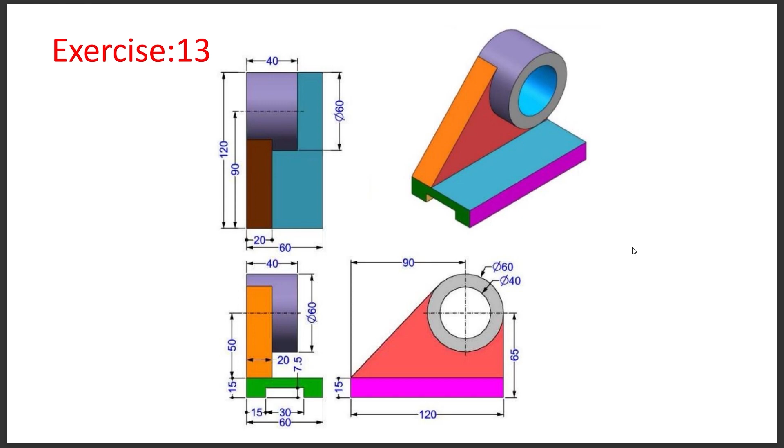Without wasting time, let us start modeling using Autodesk Fusion 360. First we need to create a new design, and save it by the name of exercise 13 to a specific folder called Fusion. Exercise 13 is saved.

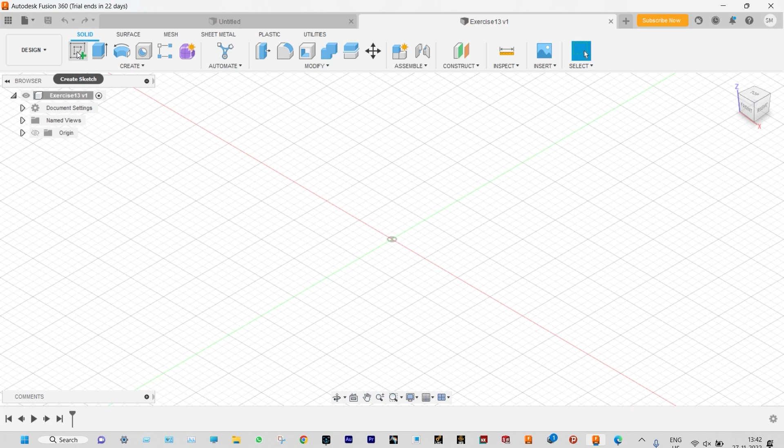Let us see the drawing again. As told before, this will be started from front view and extruded to a depth of 120 millimeter. We have to make this shape initially, starting from front plane with the sketch.

We made the sketch at random. Now we can put a smart dimension to this one: 60, 15. Again this one is 15, and this will move up by a distance of 7.5 millimeter.

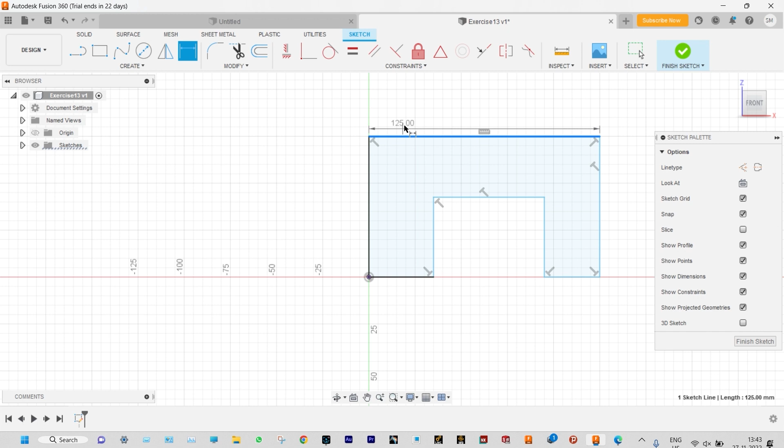We can point the dimension of this one as 60 millimeter. Smart dimension, this one is 15 millimeter, this is also 15, this one is 7.5 millimeter, and the total distance between them is 60 millimeter. The distance from here to it will be 15 millimeter, and this distance also 15 millimeter. So this drawing is complete.

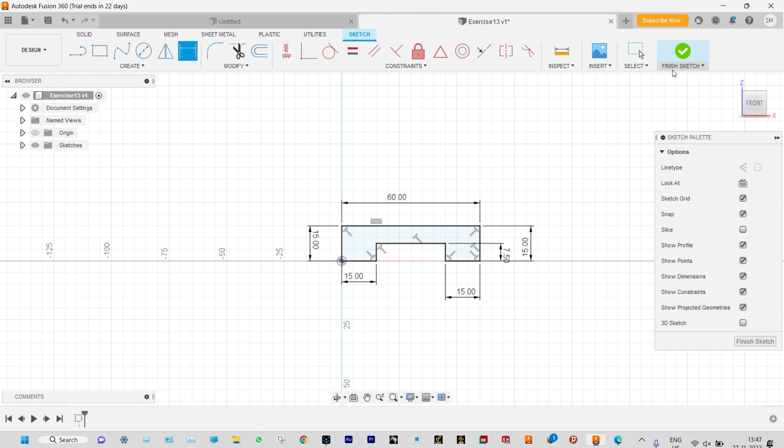That needs to be extruded to a depth of 120 millimeter. So finish sketch and let us start extrusion from here. Extrusion depth is 120 millimeter. Done. Let us see the drawing again.

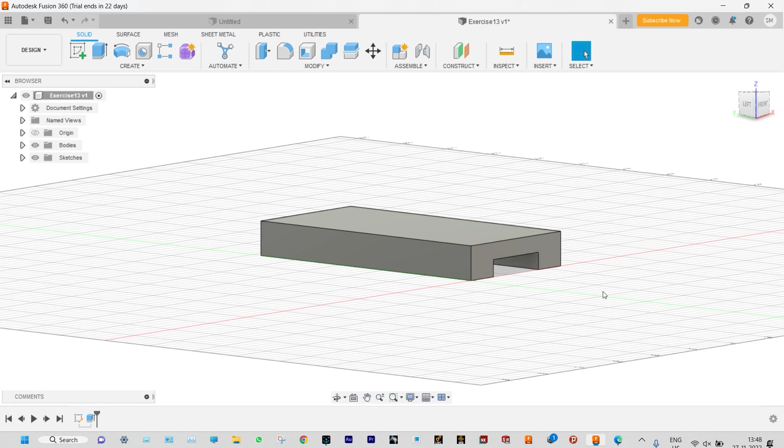Now we can start from this side view. We need to sketch this and extrude to a specific depth. First we need to make 2 circles of diameter 40 and 60 millimeter at any arbitrary position on the right view. So we need to start sketching on the right plane. We can rotate the object and select that specific plane.

Starting with sketch, we can rotate this a little bit. We need to start sketching here itself, starting with circles, providing 2 specific circles, making both concentric.

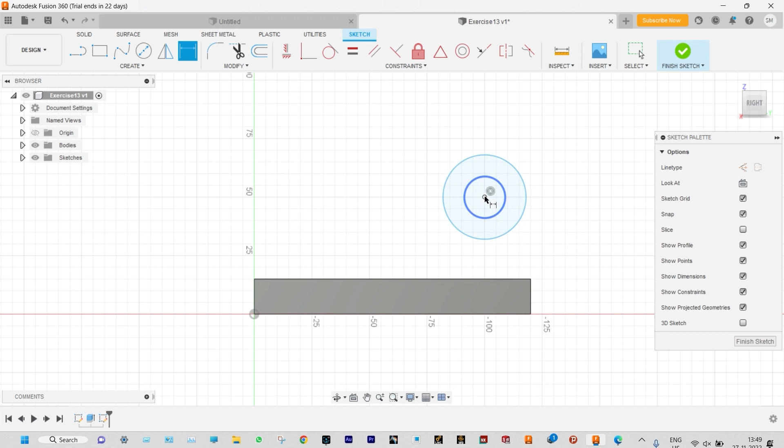Now we need to provide smart dimension to this. Let us see the drawing. The circles have diameters of 60 and 40 millimeter, and from the bottom line it will be at a distance of 65 millimeter, or from this line at a distance of 50 millimeter. You can provide smart dimension: from here to here it's 50 millimeter, and the diameters are 40 and 60 millimeter.

This one is 40 and this one will be 60 millimeter. Also, the center of the circle will be at a distance of 90 millimeter from this position, so the distance from the center to the extreme left hand side is 90 millimeter. Let us select the locations. The distance will be actually 90 millimeter.

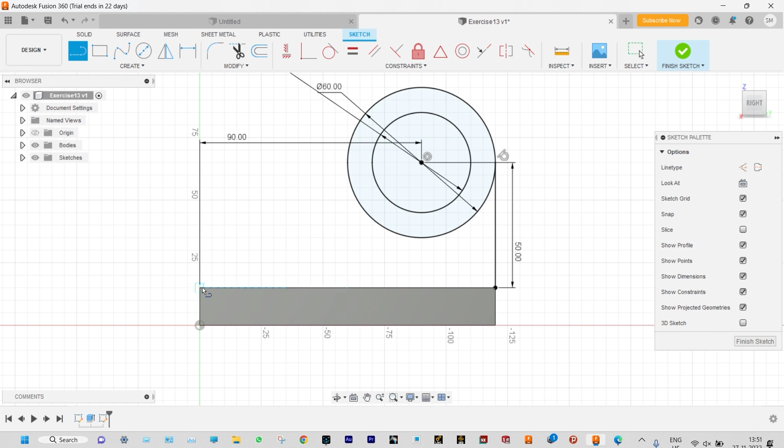Now we can complete the sketch with lines. We need to start a line from here, tangent to this circle. Initially we'll make any line, and with relations we'll provide this as tangent to the circle. So let us select that relation. The line is tangent to the circle. Done, the sketch is complete.

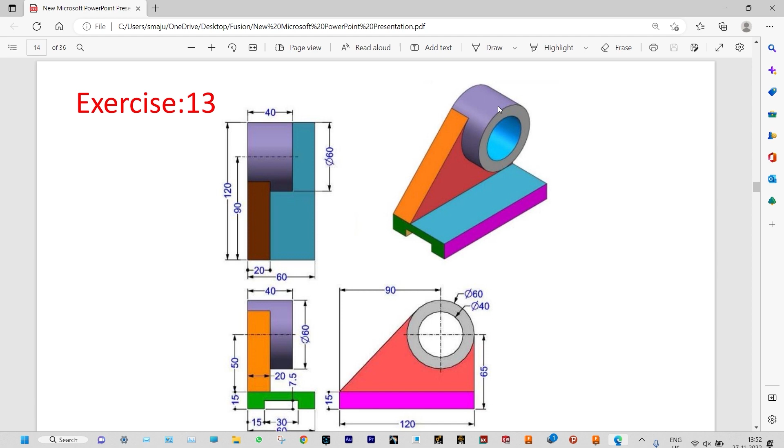Finish the sketch, and we need to provide some extrusion depth. Let us see the drawing again. This needs to be extruded by a depth of 20 millimeter, and the concentric circular portion should be extruded to a depth of 40 millimeter. Let us select this annular space and extrude it to a depth of 40 millimeter in the front direction, so minus 40, putting new body. Done. Now the remaining portion you cannot see, that can be viewed from here.

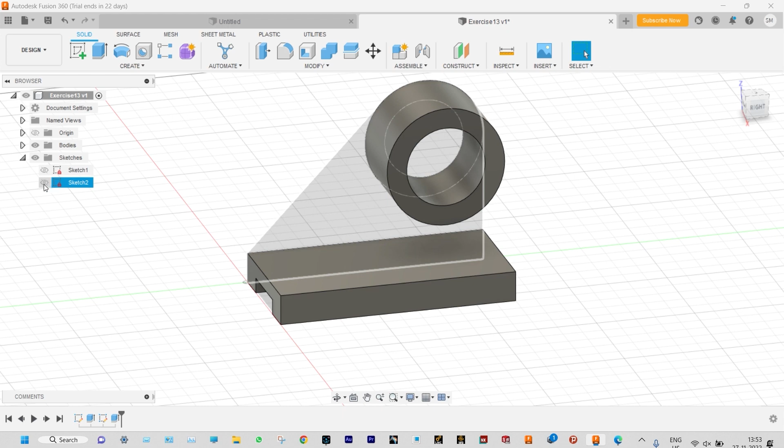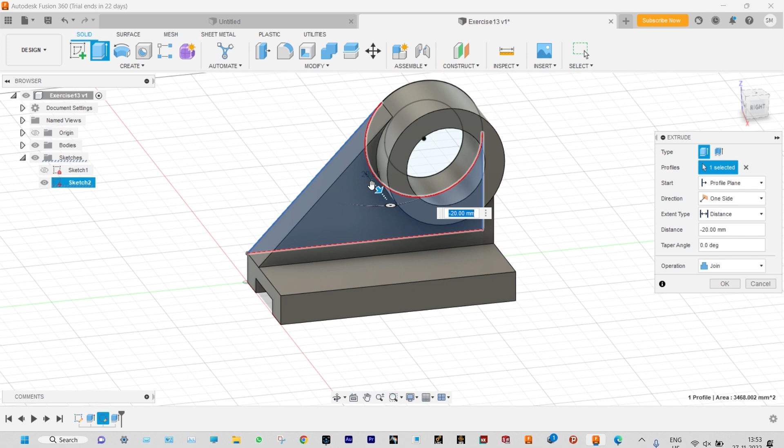This is the remaining space or drawing that needs to be extruded again. Starting with extrusion, select that area. This needs to be extruded by a depth of 20 millimeter in the reverse direction, so minus 20 millimeter. Done. Now we can hide this again. This is our complete modeling.

You can see this was a very simple modeling. Initially we started with the side view, provided the base extruded to a depth of 120 millimeter. Next we started with this view, made these annular circles and completed the sketch, which was extruded 2 times at different depths: first an extrusion of 40 millimeter, then we selected the remaining space and extruded it to a depth of 20 millimeter.

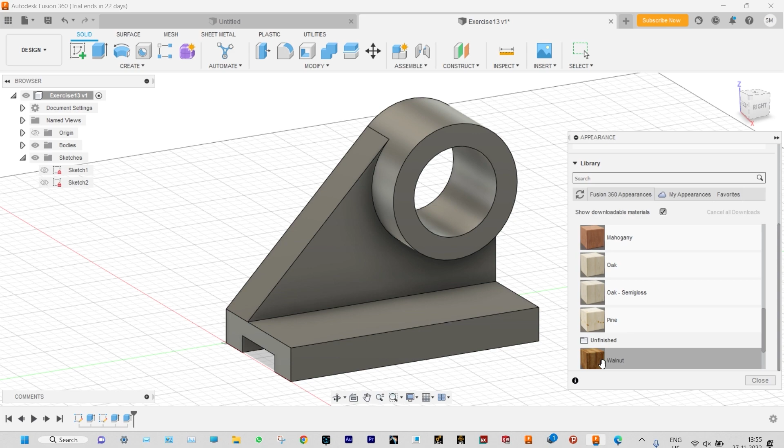Now to have a better appearance we can select the body and put the appearance as wood, which is made up of walnut. Done, you can see it.